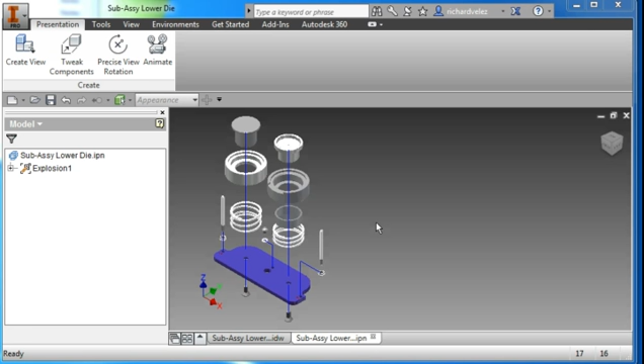This video I'm going to show you how to create this exploded assembly view. It's part of the button maker project, the subassembly lower die.

I'm going to start out by logging on to Autodesk 360 here. You're going to sign in. I'm already signed in, so I'll go to Projects and set your project to Button Maker 360, and verify that it's on the cloud, the Autodesk 360 cloud. Select Done. I'm going to go ahead and open up my assembly.

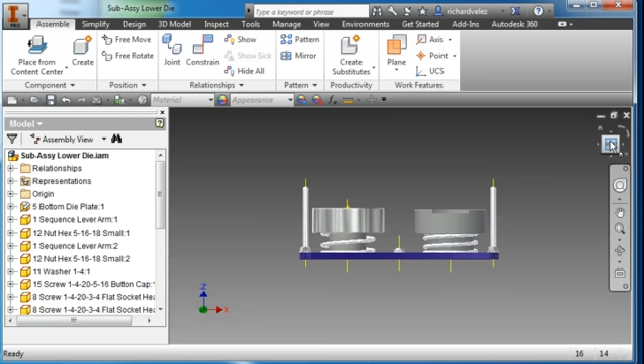The subassembly lower die. I'm going to look at my front view and verify that that is my front view. If it's not, you're going to want to select this context menu and set current view to front, and in your exploded assembly, your view is going to be this ISO view here.

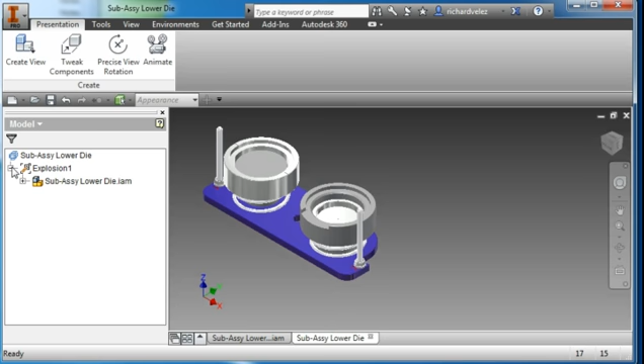I'm going to create a new presentation. Create a view. Hit OK. You notice it comes in as the orientation that I had it, with the front, and it's shown in ISO view.

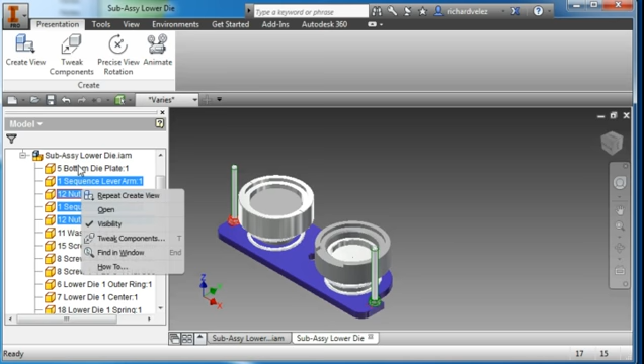I'm going to go to my browser and open up my model, and I'm going to select item 1, hold my control key, item 12, item 1, item 12, these 4 parts. A right mouse click here over these icons and tweak components, and I'm going to raise these up slightly.

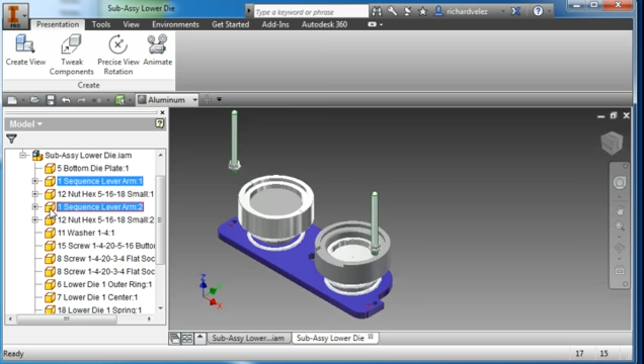Hit close. Now I'm going to select just the sequence item number 1, control, and right mouse button, tweak components, and I'm going to raise these parts up and separate them from the hex nuts. Hit close.

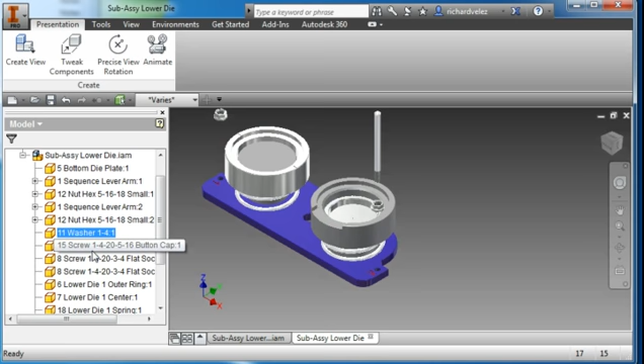Next I'm going to select this washer here, item 11, hold my control key down and select item 15, right mouse button and tweak components, and I need to move them around. I'm going to tweak these up, move them up and out, hit close.

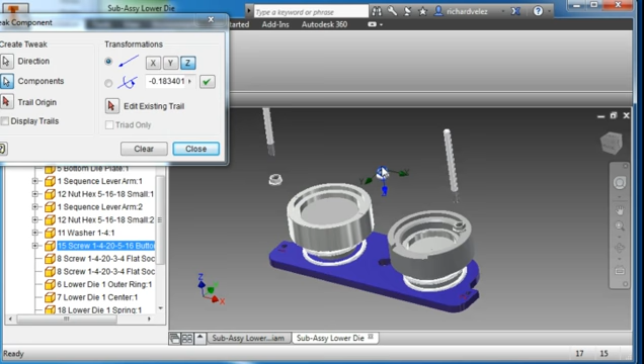Now I'm going to select just the screw of the pair, hit escape, select just the screw, tweak component, and I could move just the screw out of the washer, hit close, hit escape.

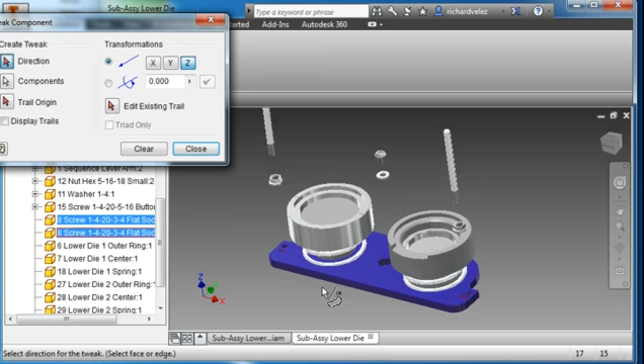I'm going to select item 8, both of them, hit the control key, select both, right mouse button, tweak components. I'm going to bring these 2 parts down. And hit close.

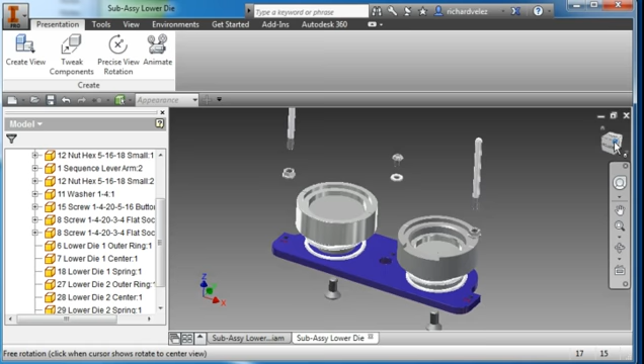Go back, hit escape, and I'm going to go back to my ISO orientation. I'm going to go back to these 2 parts and move them down a little bit more. Select both parts, holding down the control key. Hit tweak components, and I'm going to move them down just a little bit so that they're visible from down below.

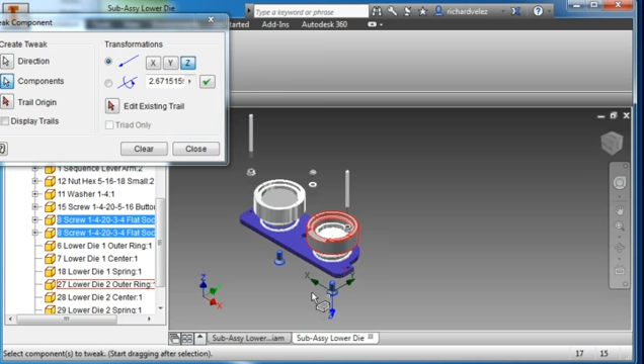Hit close. Now I'm going to select parts 6, holding down my control key, 7, and 18, and right mouse button, tweak components, and I'm going to move these parts up, kind of like right there.

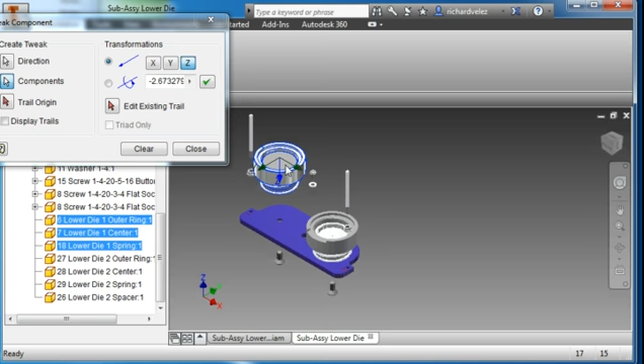Hit close. Now I'm going to leave the spring down below, and I'm going to move up just these two parts. Control button, click, tweak components. Move these two parts up.

Hit close. Now I'm going to move just the center. I'm going to tweak that and move that up. Hit close.

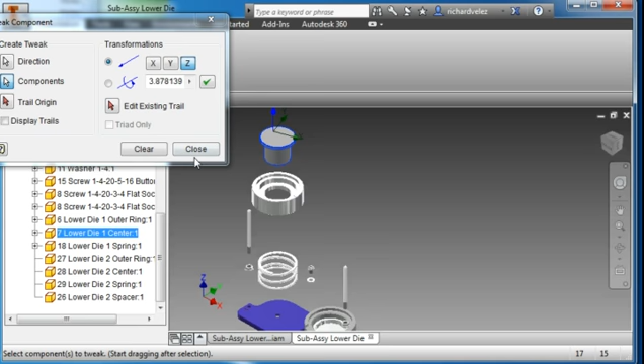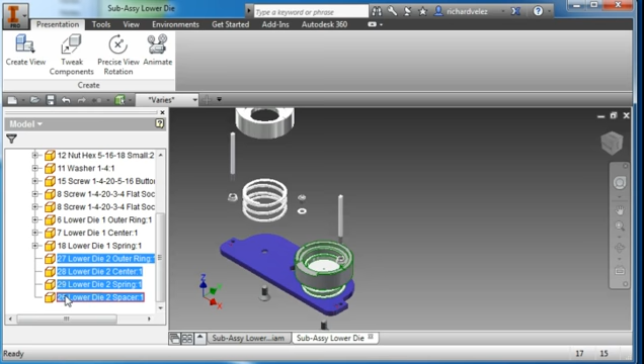Now I'm going to move items 27, 28, 29, and 26. Hold the Control key and select all four. A right mouse button, tweak components, and I'm going to go ahead and lift these parts up, get them out of the way of the other components so that they're visible. Hit close.

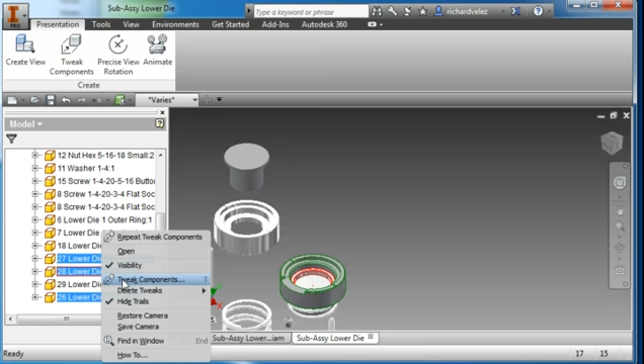Now I'm going to leave the spring down below. Select the other parts, Control, tweak components. I'm going to raise them up. Close. Now I'm going to leave the spacer down below, spacing them all out. Tweak components.

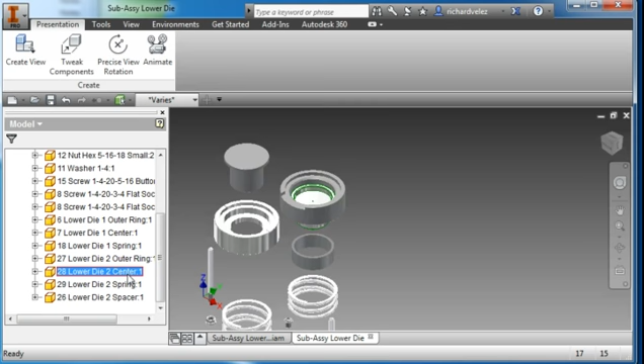Close. Now I'm just going to choose the center. Tweak. Move it out of the way. Move it up. And close. And there's my exploded view.

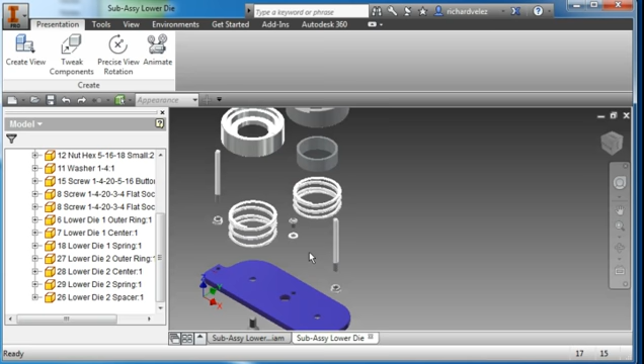Now as the final step, I want to turn on my trails. Let me show you how you do that. I'm going to zoom in and pick the parts that are on one axis, picking the part that's furthest away. You don't need to add trails to all of them, only the one that's furthest away.

I'm going to right click, and you notice that hide trails is checked on. I want to uncheck it so that the trails are not hidden. And you can see now that there's a line going from the parts to an axis to the mounting location.

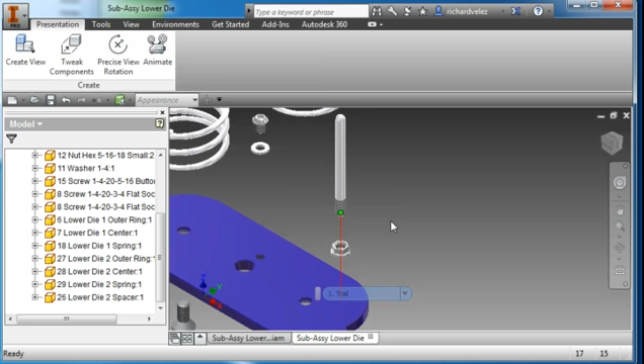Going to this part, right click, hide trails, and so forth. You could do it to all, but you don't want to add it to all four parts in the stack or all three parts. You just want to add it to the one that's furthest away.

As a final step, you're going to want to save this exploded view, and you're going to use it to create an exploded view assembly drawing.